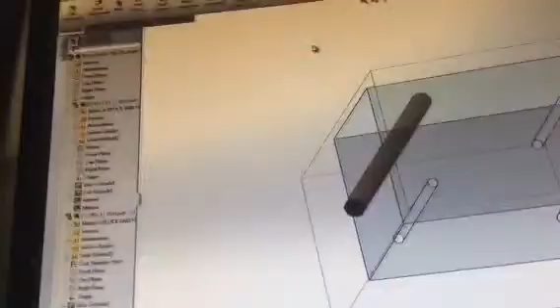2 years ago, 3 years ago, people were going, wow, 3D printing. Now almost everybody knows what 3D printing is. And they're making crazy stuff out of it. I've heard body parts, cells, skins, and all that, and they're starting to create with those.

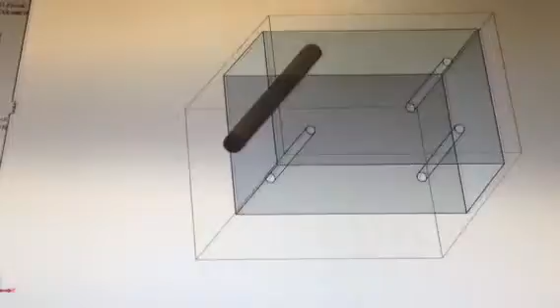We were talking earlier about Afghanistan. There was a great story somebody told about a guy. Didn't start off well. A big section of his skull was blown away by an IED. But in his flight from Afghanistan to Germany, according to the story, they were able to scan that chunk of skull, send the electronic file back to the United States. Somebody modeled that piece of skull, sent it back to Germany, and they had a 3D printer make the piece of skull, if the story is true, and had it ready for them when the plane landed and replaced it.

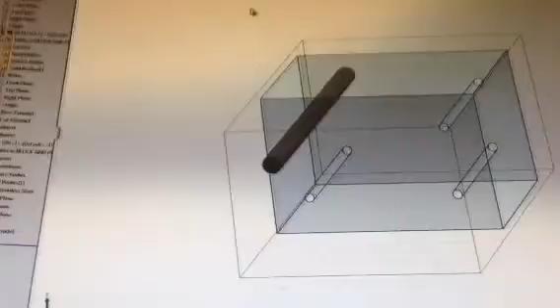I thought that was the most awesome story, put everybody else to shame in terms of their little presentations. Because one of them was talking about your World of Warcraft figures. We can, for $1,000, make your World of Warcraft figures so you can put it up on the shelf. Okay, cool story, but not $1,000. I like the Afghanistan story way better. But this technology is running nuts, and solid modeling softwares like SolidWorks are really designed to work hand in hand with those 3D printers.

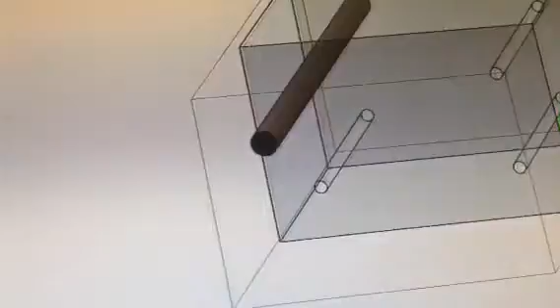We saw the story about the guy in Texas that was building automatic weapons to kind of prove that the genie's out of the bottle now. You can't regulate fully automatic weapons because he can just send files to people across the country and they can plug them in their 3D printer and they got a gun in a few hours. So, anyway, he got in a little trouble. They took his 3D printer away for doing that. But he made a point of making it very public that he was doing it just to show them, you're kidding yourself if you can stop it now. The world has become a different place.

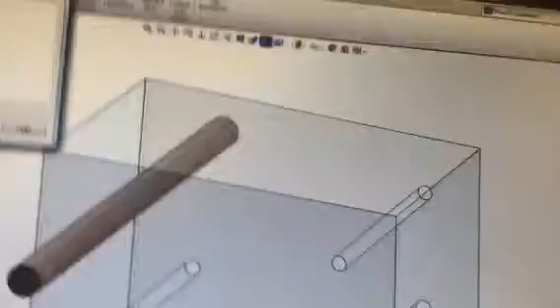But all of this is well and fine, and I've got everything fully defined as particular sizes, and I'm going to go ahead and just, one last time, save that isometric view of that one. And it comes back, oh, you made some changes to block and pin, both block and pin part. You want to save them all? Yeah, I'm going to leave them with an interfering condition right now and not worry about it. I'm going to close all these files. Yeah, okay, whatever. Come on, stop nagging me and close them. There we go. And I want to build one more thing for you before I send you packing here and let you out of here a good hour early tonight or close to.

Okay. What I did so far was not a really complex mechanical part, but I think because of my aerospace/motor racing background that everything's got to be really precise to build in transmissions. I want to see interferences in my transmission or clearances between sliding gears, all that sort of thing. But the beauty of this software is that it's not necessary to be that precise. Let me show you what I mean.

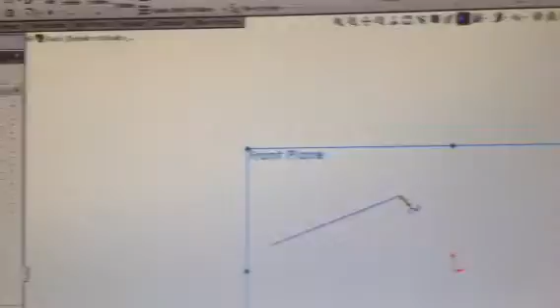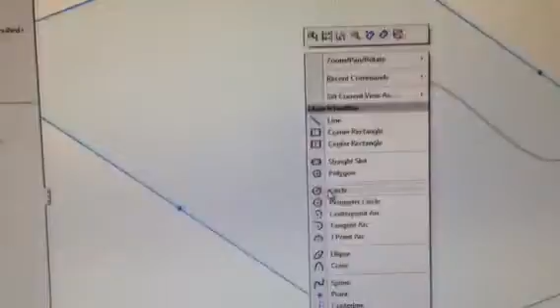I'm going to build a sketch on this plane. I'm going to build a spline. Anybody who doesn't know what a spline is, let's just say, a fairly squiggly, almost line, and call it that. And then I'll exit that sketch. I'm going to build what's called a reference plane at the end of that spline. And on that plane, we'll sketch a little circle. And maybe I'll make it just a little bit larger. Not by much.

Okay, I've made two sketches now that have no dimensions to them. Not even a relation to origin. Notice that origin, X, Y, and Z0 is out here. We don't even know how far away that spline is from origin. Makes no difference. SolidWorks doesn't require everything to be, as we called it earlier, fully defined. So let's say I take those two bits of information and make what's called a swept boss base. I select the circle as the profile and the spline as the path, and then I make it what's called a thin feature. Give it a little bit of thickness.

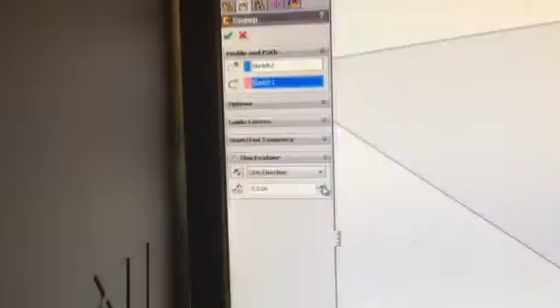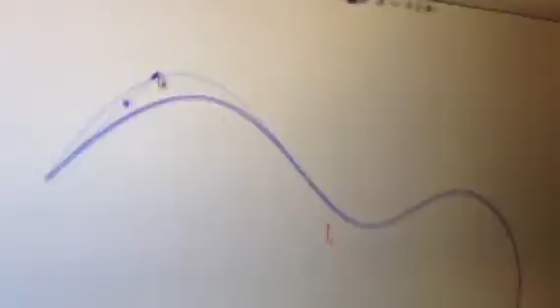Now it's a piece of tubing with a really weird bend to it. And let me hide that plane so we can see it a little bit more clearly. All right. Didn't have any real definition to that. If I want to go back in and modify it for its diameter, or maybe more interesting would be to modify that path of that spline. Let's rotate this around just a little bit and flatten that out. Move this point up here. Well, you get the idea. Exit that sketch, and now my piece of tubing follows the new path.

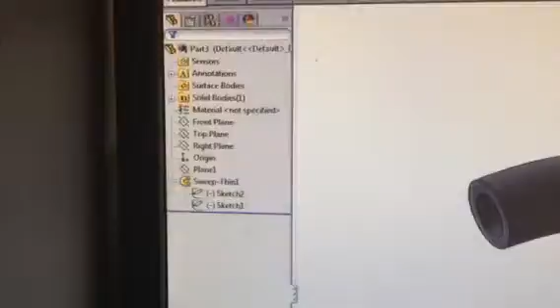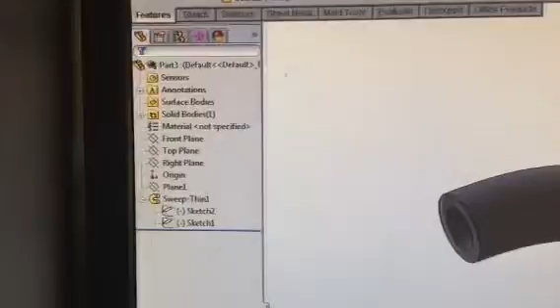Softwares like AutoCAD in particular are not friendly to this at all. They want you to define everything before it'll let you sketch. The CATIAs and ProEs are a little better. I find SolidWorks, maybe I'm a little biased because I work with it so much, a little more user-friendly than the CATIAs and the ProEs. But they'll all do this ultimately. AutoCAD in particular really has a tough time with this, but what's beautiful about this kind of software in this regard is now, not only can I do those things that I like because I'm a left-brain person, everything's gotta be organized and precise and exact, that's why I became a machinist many, many years ago, really anal about sizes.

But let's say I'm designing, I always give this example. This computer printer up here has a casing around it. Say I'm working for the company that makes those printers, and the head designer, he's got an idea in his mind as to what he wants it to look like, but he's not really able to define it or describe it. He'll know it when he sees it. So I start to design this outer casing, and he comes back to me and says, no, it's really too rounded and too spacey looking, I want it a little more squared off. With this type of functionality, I can just drag things around until he says, that's it.